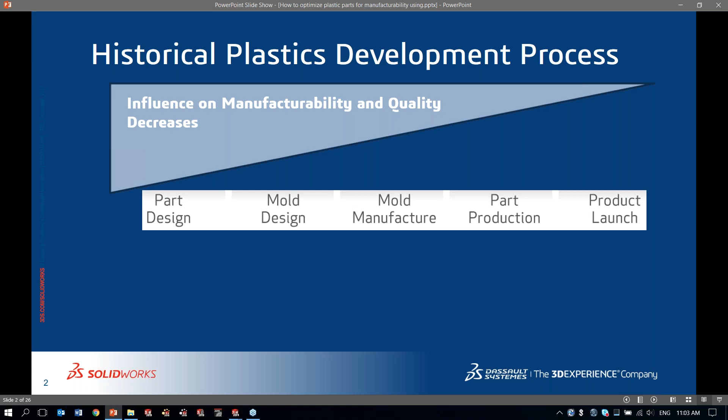So the beginning portion of this process influences immensely the manufacturability and the quality of our parts. So how the parts are designed and how the molds are designed both have an impact on these aspects of manufacturability and of quality. So if they're not verified, if they're just simply designed, then you have less manufacturability and less quality.

Then you move on to the next section of the process where you're making the molds, you're making the parts, then you increase the responsibility that you have as a manufacturer to meet your requirements that are expected either from the person you're supplying this to or the consumer that's going to be buying these parts. This is where your guarantees need to hold up, and we want to have your part have the best quality.

So let's take a look at some options of how this is typically done in the design of plastic parts. So the part is designed, the mold is designed, the mold is built, we go to production, and something is detected that the part has a defect at this point. Then what we do is we circle back. So they can go to in-depth simulation at this point, which may be one solution. It may be done in-house. It may be done by somebody else who has more expertise in the simulation.

Or simply the process can circle right back to part design, mold design, with iterations of trial and error, of let's see if we can try something else that will make it a little better. This is obviously very costly, very inefficient, and when all is said and done, hopefully the problems are fixed, but there are obviously better ways. So we're not quite there yet, though.

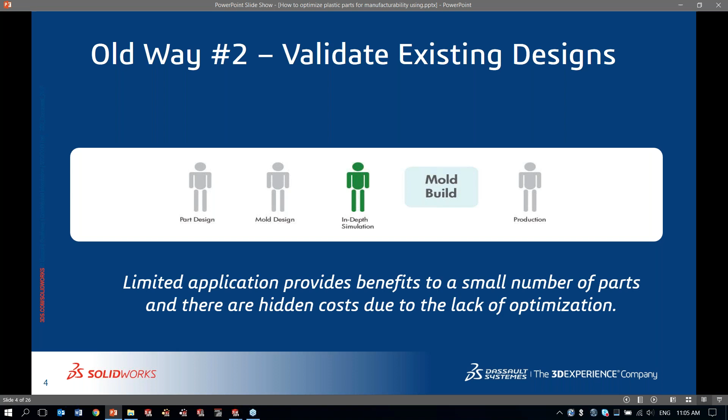As we're doing this, obviously people who are doing this are basing their designs off of a lot of experience. And there's great value in that experience. But sometimes, even as a designer, you're asked to do something that's new, that's different, that may be smaller, that may be just a little more challenging. And at this point, experience takes you to a certain degree, but it would be a whole lot better if you had the confidence of simulation behind it.

And the optimized way, or the preferred way, would be to be able to design your part, simulate the part so that the part itself is manufacturable, will give you the quality that you want, design your mold for it, and have that also simulated, whether you're doing it or another company is doing it, making sure that that section is simulated as well before you go to manufacturing anything at all, so that your end result is as optimal as possible.

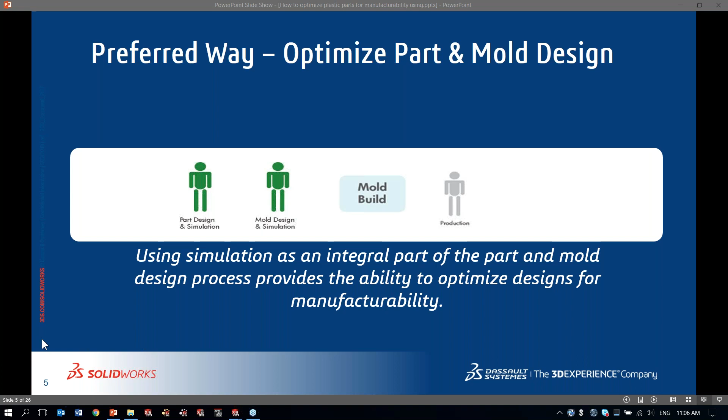has the best quality, and you're sure that it is manufacturable at that point and that you're not coming back to do it. Because as you're doing all of this, there's a cost to doing the work up front, which is the case here, versus doing it at the back end. And in our next slide, we illustrate how this cost is propagated.

So you're going to say, well, if I do all of this work at the beginning, I have to, one, invest into simulation tools, which is going to cost us some money. We're going to have to learn how to do this, and then we have to take the time to do the simulation. And the reality is, yes, you have to do all of that to be able to do the simulation at the beginning.

But the reality is also that this will cost you less, will have less impact on the overall cost versus having to take a design that's already been done, a mold that's already been manufactured, parts that have been manufactured, and come back and start back at the beginning. So this illustrates this a bit. Best to take the time up front and invest up front in doing this versus the cost at the back end.

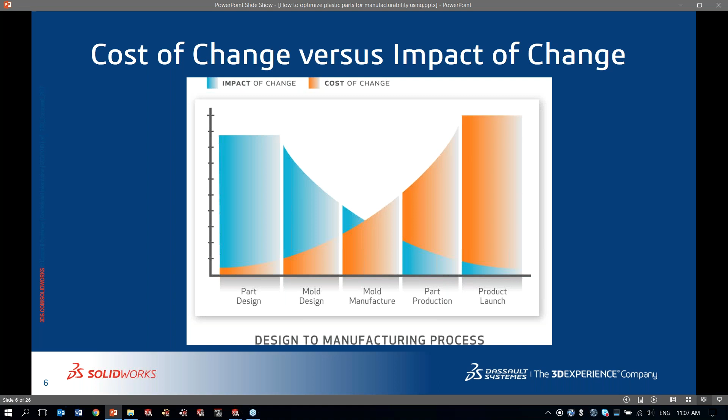So with this topic, we have information today on the first part of this, which affects your part design. So Michel is going to take you through some information on how to optimize plastic parts and how to get them right the first time so that iterations don't have to be done. And we have a session next week that's scheduled to go into the later part of the design, which is how to simulate your mold manufacturing, so that that portion also guarantees you the best success in your part production.

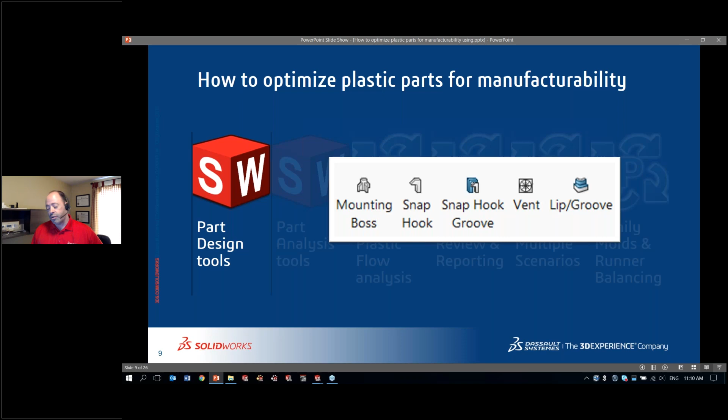Inside of SolidWorks, before we go to plastics, we're going to explore a few of the design tools. Those are really design tools geared for molded plastic parts, things we see quite often in a plastic part. If you have an old TV remote and you take it apart, you're going to see some of those features in there, that's for sure. So I'll cover some of those and see how we can use them inside of SolidWorks. So let's just jump in SolidWorks.

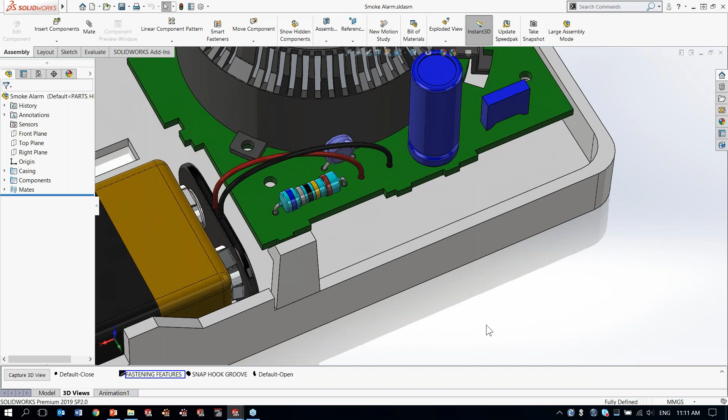So as I'm moving inside of SolidWorks, this is going to be the example I'm going to be running with today, a little smoke alarm. And if we isolate this area, we see a PCB board, and we need some mounting bosses to support that board. So I'm going to simply, in the assembly, edit this part.

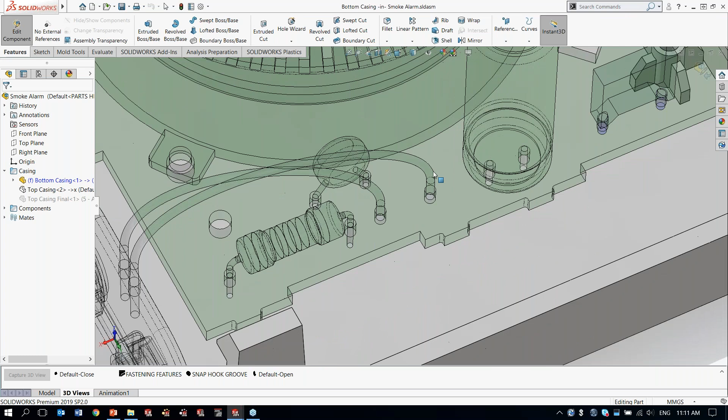And as I'm doing that, I want to just show transparency so we can see a little bit better through the PCB board. And as we can see over here, there's already a mounting boss set in there to support that PCB board. We want to create another one for this hole here. Now, how do we go about doing that inside of SolidWorks? As I said, very easily, I do have my features here, and one of them is a mounting boss.

The only thing I need to select here is a face where to set this boss. I already have a great preview. We have different options for bosses, so either a hardware boss with a head or with a thread type design, or it could be a pin with, again, a pin design or a hole design. So all the variations are there. It's really about you selecting which one works best.

And then when you do that with a great preview you get on the screen, you can go in and define all of the dimensional information for that feature. So you don't have to draw anything, you just have to select the right size that works for your design. Now, additionally, if you want to standardize, what I like to do quite often is actually create favorites. So this is my favorite hardware mounting boss dimension. I select it, everything is preset. The only thing I need to do at this point is to select where it's going to be located.

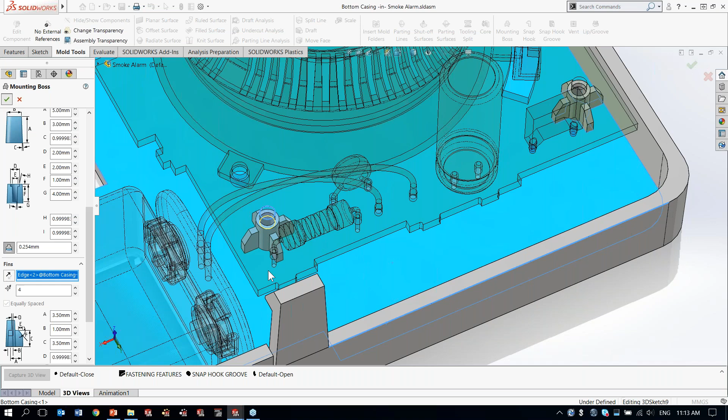So I'm going to pick the circle here of my PCB board hole. I select it. Last thing I want to do is orient the fins, and you can see the fins are not oriented the same way. So I'm going to pick an edge to help them orient the same way as the other one. And very quickly, I've got this done. That's how easy it is. I got the whole feature. I didn't even have to sketch anything. Everything is ready to go and ready to get to the next step.

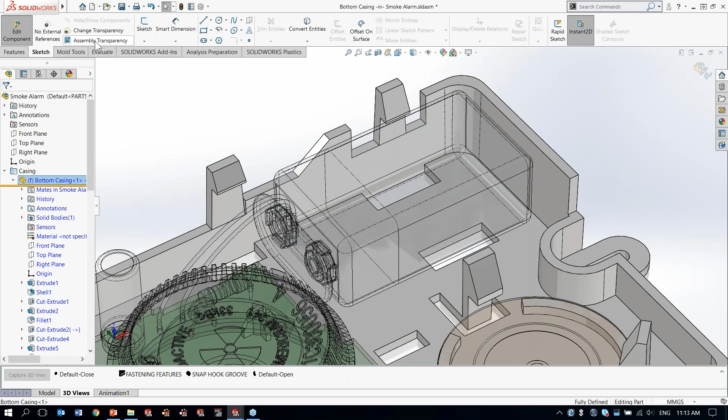And the next step, I'm actually going to show something different. Let me just rotate the model around and zoom into the battery area. So in that area, what I want to do is to design a hook that's going to snap the battery in place. We already see some hooks designed over here. That's for the core cavity, but I want to design and show you how we can create those very easily again inside of SOLIDWORKS. So again, one of the fastening tools I got is a snap hook. How does it work?

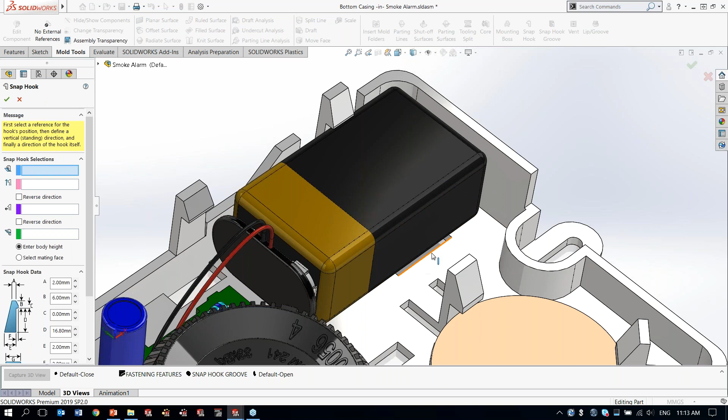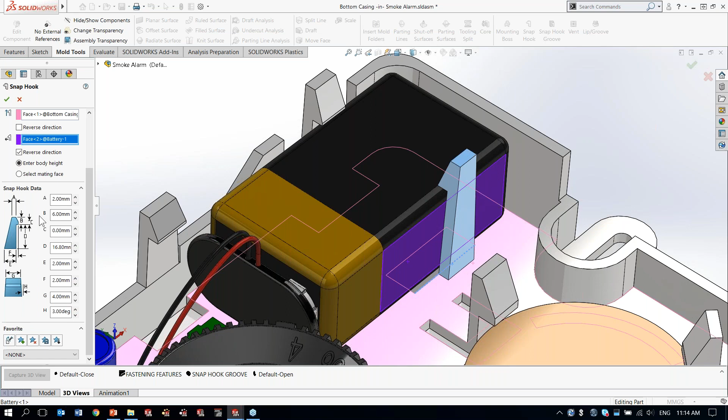Again, very easily. I select where I want it to be located, the direction, I use a face as a direction. I want it to be flush to the side face of the battery, so I'm going to select the face here and say reverse direction. As I did with the mounting boss before, I could come in and tweak all the dimensions or use a favorite. And as for the height, I want to again repurpose the actual part here and say it's going to be flush to the top face of the battery. And with a great preview, I know exactly what I'm going to get. I click OK, and I'm done. So again, the snap hook feature is really useful when you want to create those designs really, really quickly.

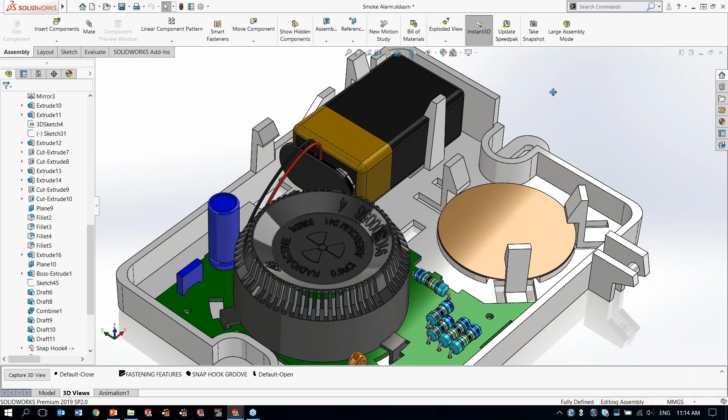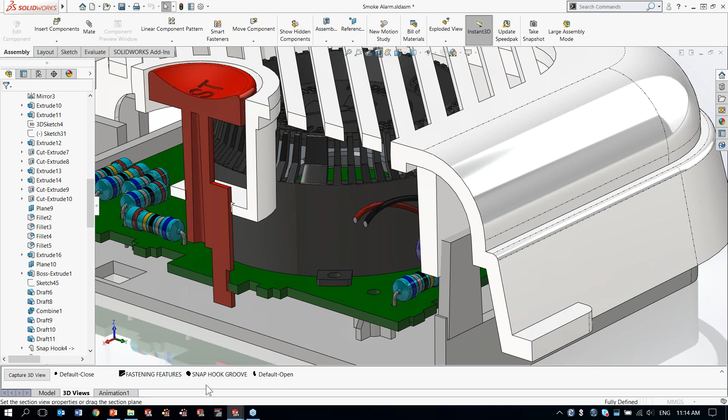Now, the other thing I want to do here is let's go over here to my orientation, and I'm going to get into that section view. And if we zoom in, let me just go and modify the section view and push it in a little bit further. And as you'll see quite quickly, over here I've got my snap hook design, but in the other part next to it, I need to have that groove that's going to accommodate the hook, right? So let's go ahead and see how we would do that.

Again, in the context of the assembly, I'm going to edit the top part. And I got the feature snap hook groove designed specifically for that. The only thing I need to define is what is my hook. That's my snap hook. In which part do I want to design the groove, so it's going to be into this one here. I select it. And then I just have to specify the dimensions of the groove, click OK. And again, SOLIDWORKS goes ahead and creates that for me without having to sketch anything, design anything. Everything's done, everything's easy.

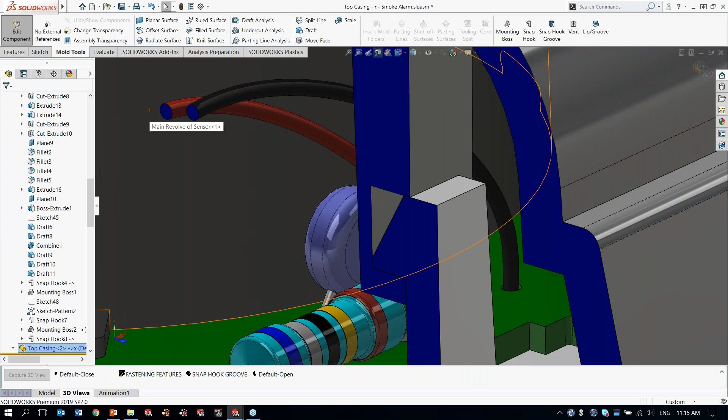There we go. So as you can see, there's quite some nice design tools inside of SOLIDWORKS just to save you a lot of time just on the design side of things. Next, I want to talk about, again, inside of SOLIDWORKS, some of the analysis tools we can use inside of core SOLIDWORKS to help with plastic part design: draft analysis, undercut analysis, and things as such.

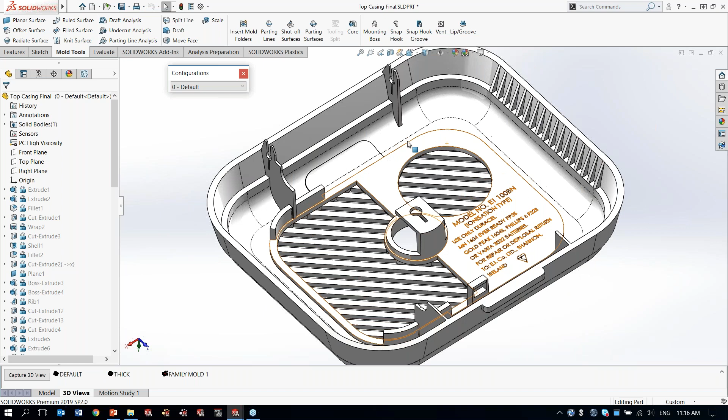So again, let's switch back to SOLIDWORKS. And in this case, I'm going to go to this part. This is my cover for the smoke alarm. And inside of SolidWorks, inside of my mold tools, let's explore the first one that probably everyone uses in a very common way, the draft analysis. One of the key things when you have a molded part is to make sure that you have a good draft analysis on those faces.

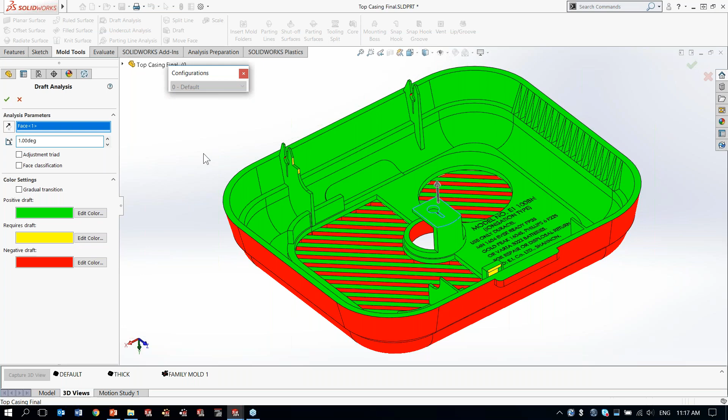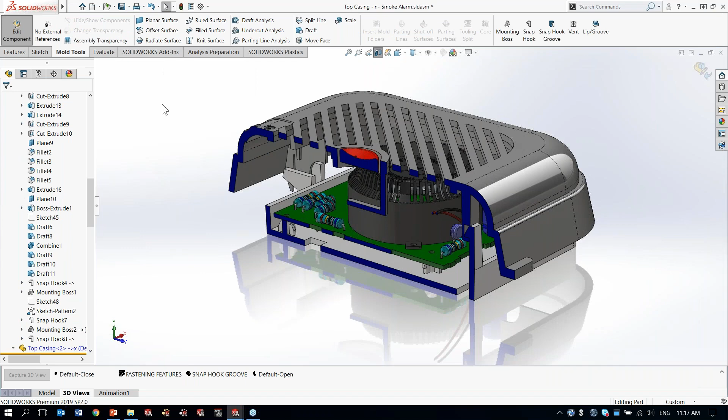So I'm going to set my draft analysis to 1 degree, and now we have a nice color code all the way around this part that shows us the draft and the properties of those drafts. So if there's any faces that need draft, we could fix them quite quickly. Actually, I wanted to show you this part. So let's switch components and instead go over here and open this part. So I actually wanted to show you one of the designs that had a draft problem, so we can show you how we can fix it quick.

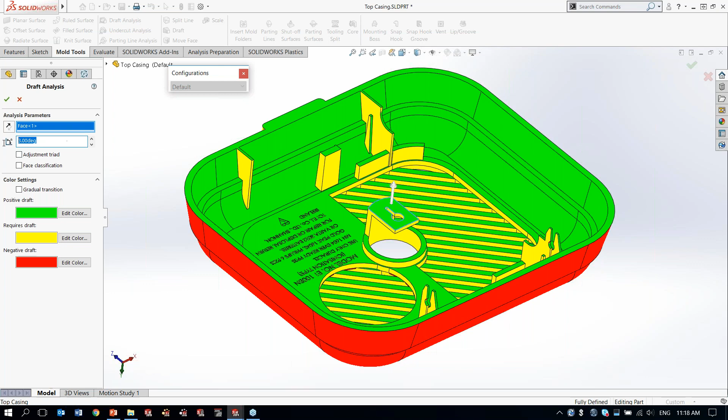So over here, again, let's launch the draft analysis. Very easily select a face for the pull direction, select an angle. There we go. So this is actually what I was looking for. I was looking for an issue so we can fix it together. And we see here that we have positive draft in green, negative draft in red. That's all good. But in yellow, those are the issue areas. So there's no draft here in yellow.

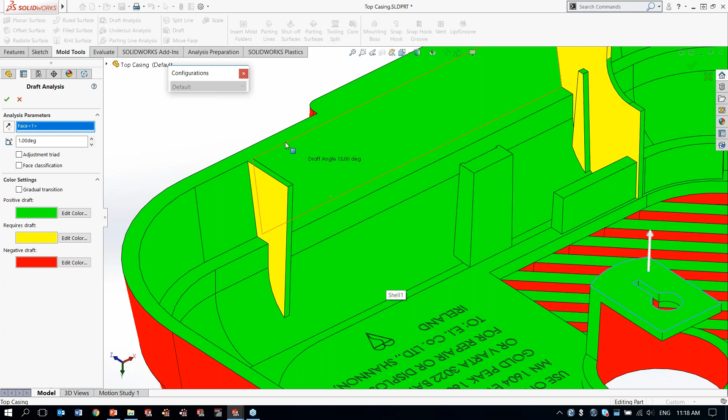One of the nice things I like about SolidWorks as well, when I do the draft analysis, as I move my cursor on those faces, I have a real-time readout of the actual draft angle on that face. So as I move around, I can tell exactly what's the draft angle at that particular location. When I click OK, you're going to notice that the draft analysis actually stays active. And it does that so it helps me figure out, when I add a draft to those yellow faces, if I'm doing things correctly.

So I selected a face for my draft angle. I'm selecting the faces to add draft to. And after I do that, you'll see that the model simply updates and becomes all green, meaning that all my draft issues have gone away. So I got a good draft analysis. I got good drafts on all of the faces.

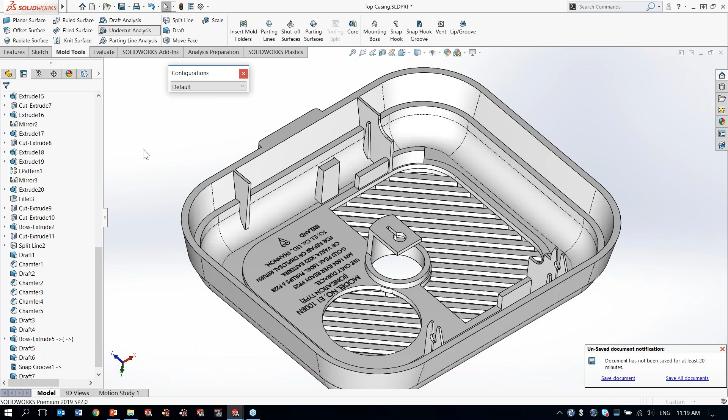One of the other tools I like with SolidWorks is the undercut analysis. Similar to the draft analysis, the undercut analysis is going to show you faces where there's an undercut, which in the mold world would mean that you probably would have to have some side actions in your mold. So that's a really quick way to understand if the cost of the mold is going to go up because there's more complexity in your mold.

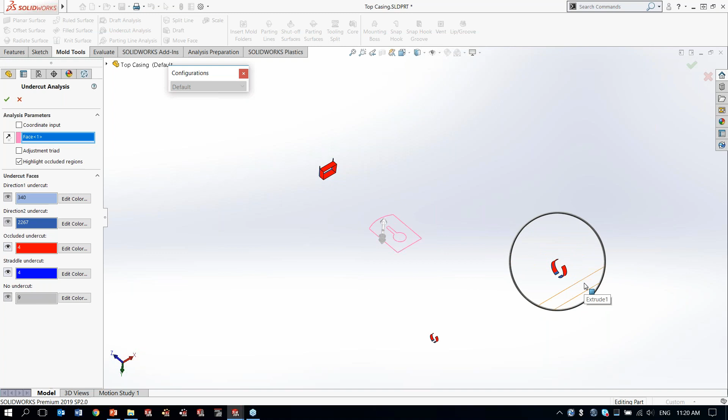So very quickly, I'm able to figure out these areas here you see in red. So for that, I'm going to have some special operations in my mold to figure out how to pull this or open the mold, some side cores and things like that. So with some of those tools, you can also eliminate some design flaws that could creep up into your mold design or part design very quickly, to eliminate some of the errors downstream.

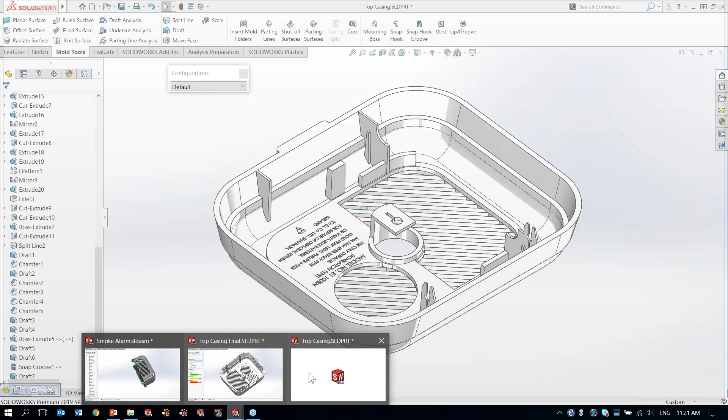Now, next thing is that we actually want to start doing a plastic simulation. So here I'm going to show you how to create from scratch in a part that plastic injection simulation by selecting the material, running the analysis, and later on, we're going to look at some of the output results. And I'm going to do that live, mind you. So everything here is going to be done live. So let's go to our part. And I'm going to leverage quite a bit the configurations inside of SolidWorks to do that. So let's quickly reorient it.

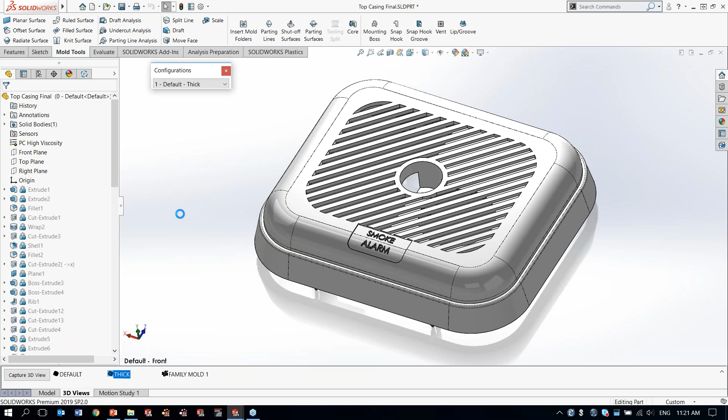And actually over here, that's the orientation I'm looking for. SolidWorks Plastics is an add-in to SolidWorks, though in the add-ins you see it's already turned on. So I'm gonna create a new plastic simulation.

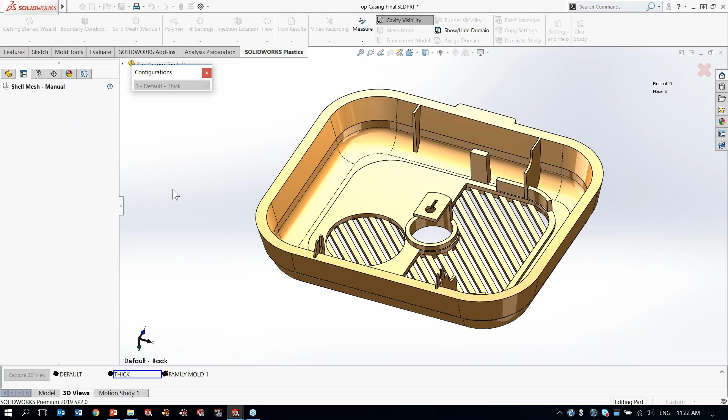So the first step is going to be to create a mesh, which is familiar. If you've done FEA before, it's very familiar. If you're not, it's still very easy. We could do it automatically without much input. I'm actually going to create this one manually because I'm going to be running this live. I'm going to start with a fairly coarse mesh size so it runs well and we don't wait too long for results to come back.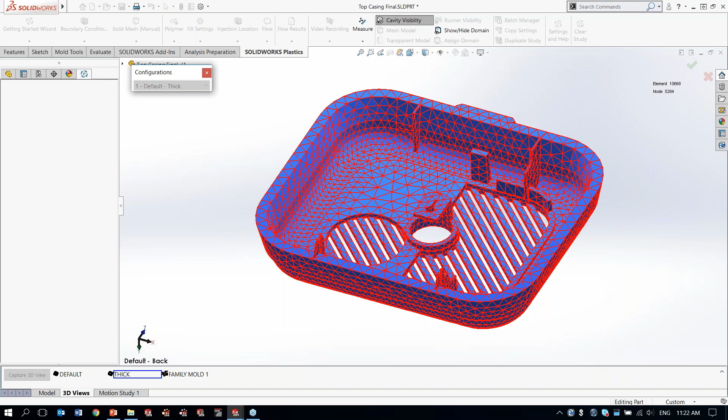But very quickly, I'm able to take this model, create a mesh, and once my mesh is created, I click OK, and I'm basically ready to go to the next step. I need to define two more things before we actually run the simulation. First thing is the material. So I can go over here in my materials, open up the database.

Now this database has hundreds, if not thousands, of materials already set in. Based on the plastic type, I'm going to actually use a PC material. Based on manufacturers, there's quite a bit in there that's just PC, so a few hundred. So there's like thousands of materials in here. For now, we're going to use a generic PC type material, and we can see the viscosity and all of that information about that material. And you can also create your own user materials as well. I'm going to use the one in the library, which is a fairly generic one.

I've set the material. The last thing I need to do before I run the simulation is to set where my gate is. Now I think that a gate location somewhere over here might be a good area. So I'm going to select it on the screen on my model. It's going to be a 3mm gate size. I say I want to add location. Click OK. So very visually, I know exactly where that gate is. And at this stage, I just need to run the simulation.

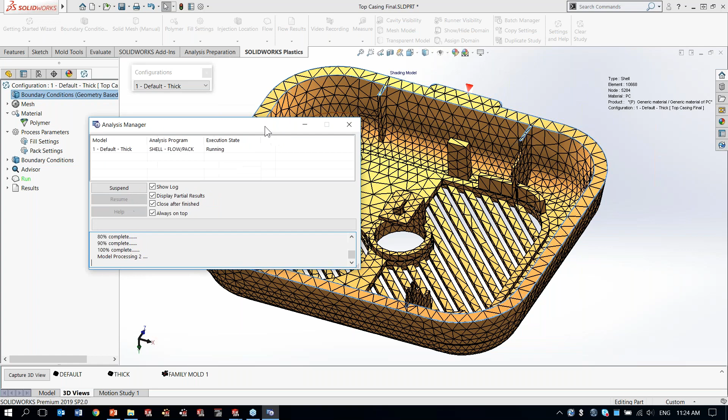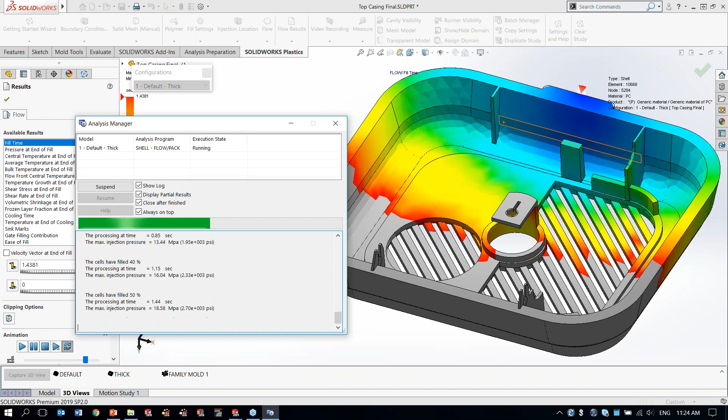Now I'm actually, again, running this live with you guys. And as it's running, we can see some results in the window here. We can actually see the pressure at that percentage of filling, and we can see the mold starting to fill on the screen. So as it's doing its calculation, it's also starting to show me some preliminary outputs and results. So if I see something totally off, I could actually just kill it and maybe decide on a different injection or gate location. But very quickly, I'm able to get some outputs.

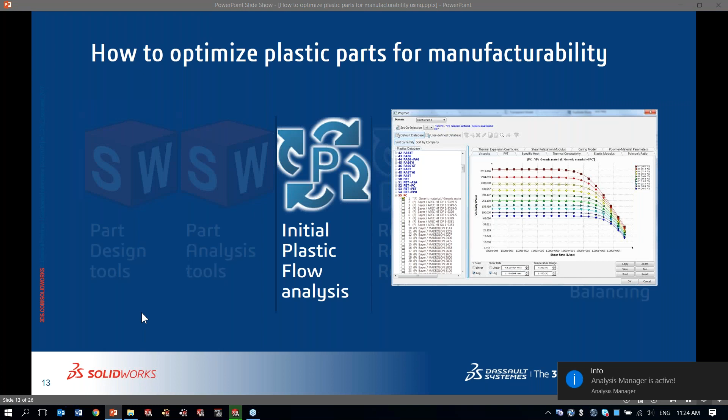So as this is running, I'm going to minimize this and go back over here. We'll look at the results right after that. But I hope you can see how quick and easy it is to set up a plastic simulation. Very quickly, I've created three things, really: the mesh, defined the material, and once the material is defined, you just need a gate location. And for something as simple as this, that's pretty much all you need for it to run.

Now, as the simulation is finishing up, we're going to look at the results and see how we can understand those results to figure out if this is a good part or not. And then we're going to do some reporting to share those results with other team members, for example, to see if our part can be molded correctly and is a good part.

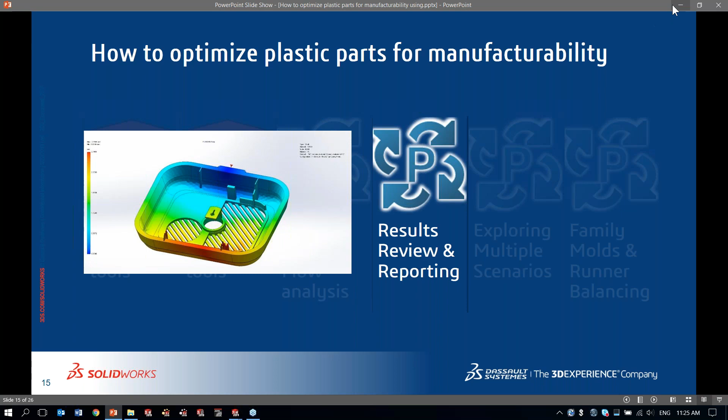So when your simulation completes inside of SolidWorks Plastics, we get this output, which is the fill time. The first thing I like to draw attention to is the result advisor, which gives you kind of a green, yellow, red light system telling you if it's easy or not to fill this part. It's telling me that the maximum injection pressure is 33 megapascals.

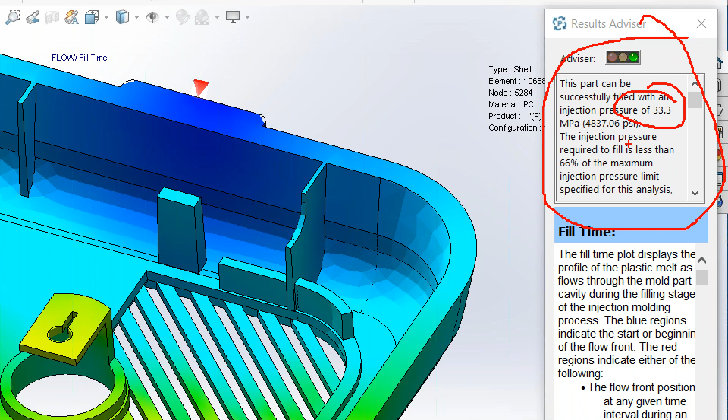Most injection press machines will probably run around 100 megapascal, so I'm actually not quite using the full capacity of my machine. It could actually take a lot more. That's basically what it means.

There's that effect we call race tracking, where the flow front on the wall is actually coming faster around the part than it's filling uniformly. So that's a phenomenon called race tracking. Usually that means that my wall thickness is too thick, so we want to eliminate that.

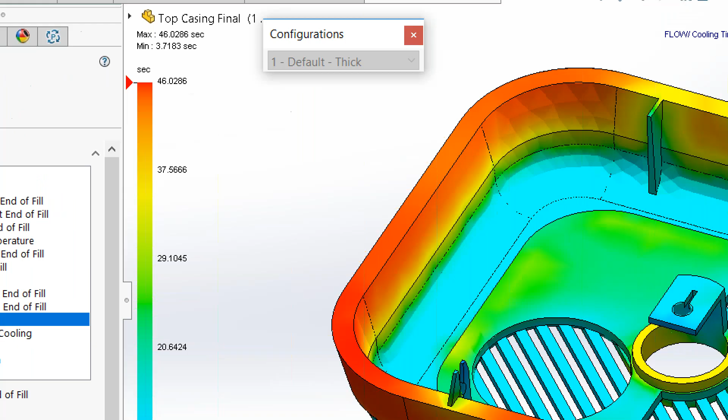But we can also look at other types of outputs. One of them is going to be the cooling time, and we see that the cooling time is actually quite high, 46 seconds. That means this part has a long manufacturing cycle. If we want to get the cooling time lower to be able to produce more parts in the same amount of time, one of the solutions is going to be to get the wall thickness down.

So very quickly, we're able to see in this part that the wall thickness is too thick. We kind of deducted that because of the race tracking effect, and the cooling time is quite high.

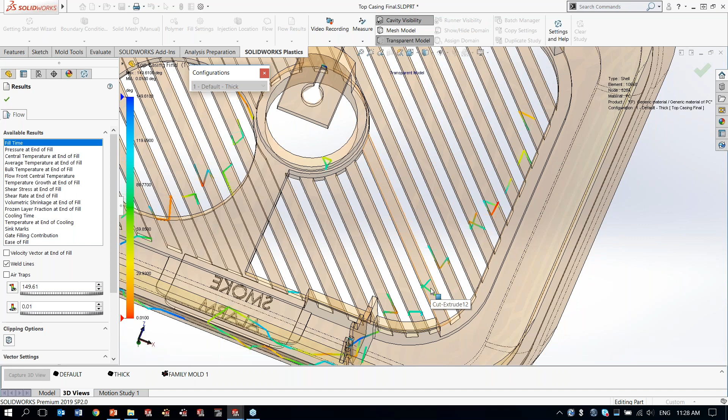If we look at some of the other outputs, we can look at the weld lines. Looking at the weld lines, we see that there's actually a lot of weld lines located in the grill area or the opened out areas. Now we want to avoid weld lines as much as possible, although we can't. In a part like this that has internal openings, there are going to be weld lines, but we can strategically decide, depending on the gate location, where those weld lines would be.

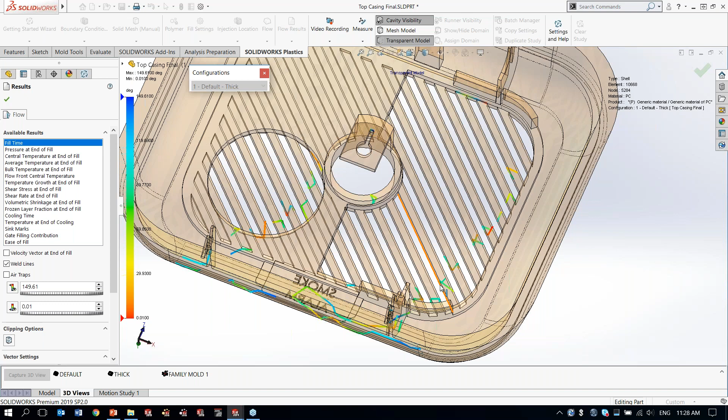This is going to have a negative effect on the structure of the part - it's going to be weaker at the weld line. So we want to avoid having weld lines in an area of the part that's already weak, like those openings. That's something to keep in mind a little later on - we're going to see how we can fix that.

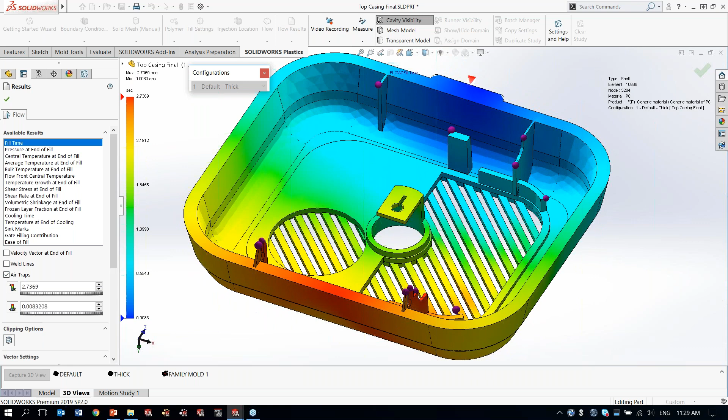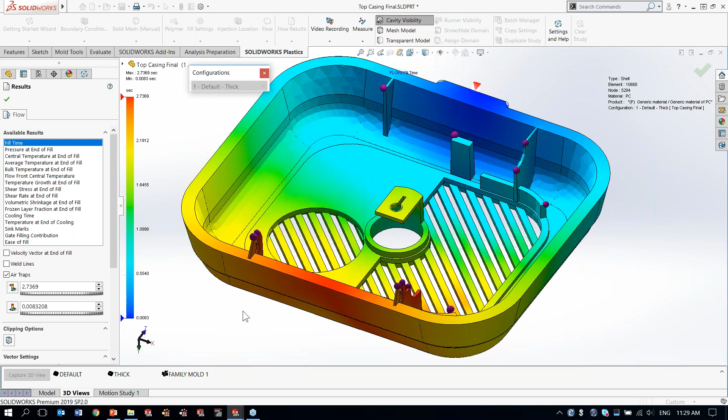But we can also look at air traps. Again, another common problem in mold making is getting rid of the air inside the mold so it doesn't burn the part. Now we can quickly see where the air traps are located. If they're on the split line, usually that's good because the air can vent through that split line, but it can also be a really good indicator of where to position ejector pins, again as a method of venting the part.

There are so many other outputs, I won't go through all of them, but what's kind of neat is we can also create a summary and report quite automatically from this. I already created the report yesterday, and I'm going to show you the output. It actually creates three types of reports - the first one is a Microsoft Word report.

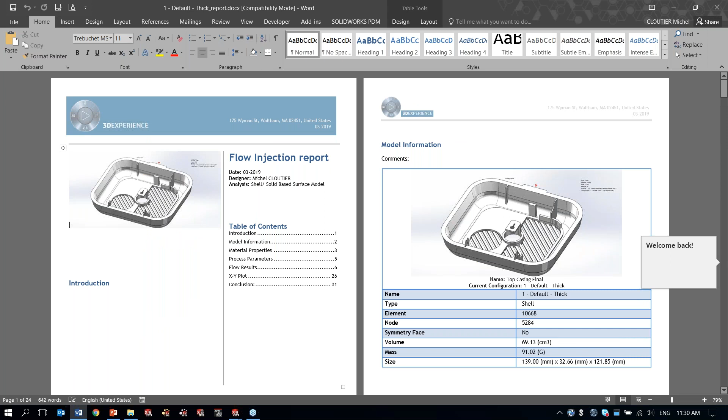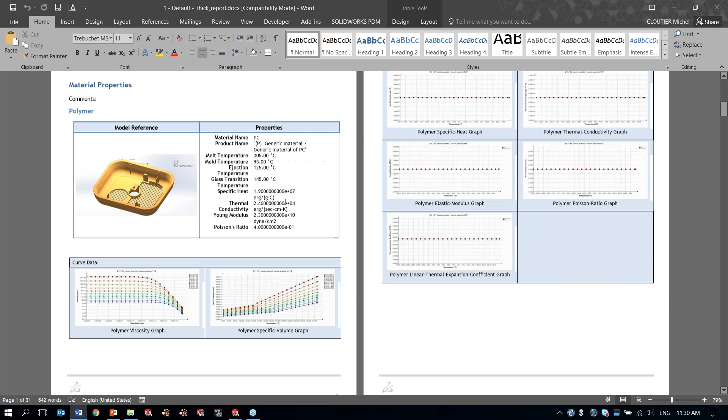Again, this was done automatically, I didn't edit any of this. It was just a simple output with all the information about my part, the material I'm using, with a graph for the viscosity, all that information. Again, my fill settings, my flow summary, and then down here, all the outputs selected for my report - fill time, pressure at end of fill, temperatures. So all of those reports or outputs can be captured in a Word document.

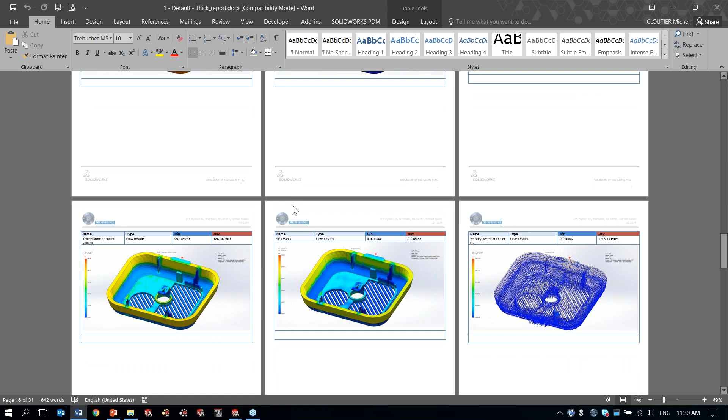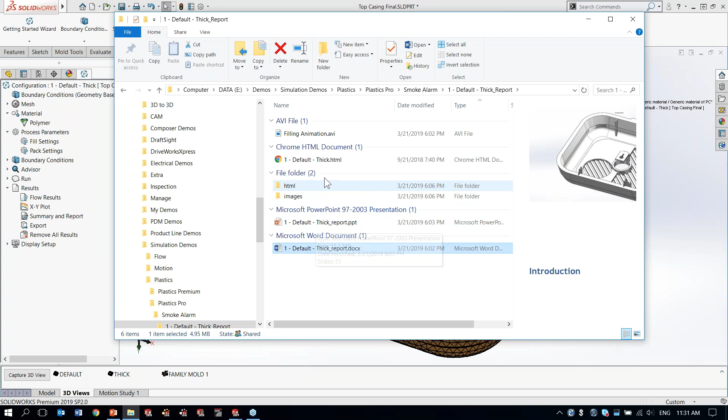We could also output a PowerPoint or even an HTML output. Now the nice thing about the HTML, you'll find pretty much the same information, but in the HTML you can even have animated images that show all of those simulations, those outputs.

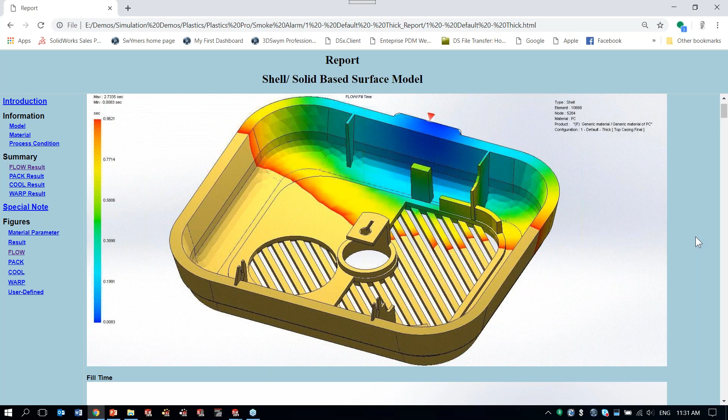It's a great way to share and create that information, but really it's to understand what's going on. So quickly, when we look at the outputs, we understand if there's any issues with the design of this part, and we can start making assumptions as to how to fix them. And that's exactly what we're going to do next.

We're going to go ahead and explore multiple scenarios. Now, what could those scenarios be? It could be scenarios about a model change to design a better part, maybe change the gate location, maybe change the materials. I'm going to be doing a mix of all of those.

So the first issue we saw on this part was that the wall thicknesses were too thick. That gets the cooling time way up, too much time to cool down, which can introduce other errors like sink marks, which we could show on a graph. I didn't show that output, but that's one of them. So let's start by doing a model change and see if we can make the part thinner to reduce cooling time, have a better injection profile, and things like that.

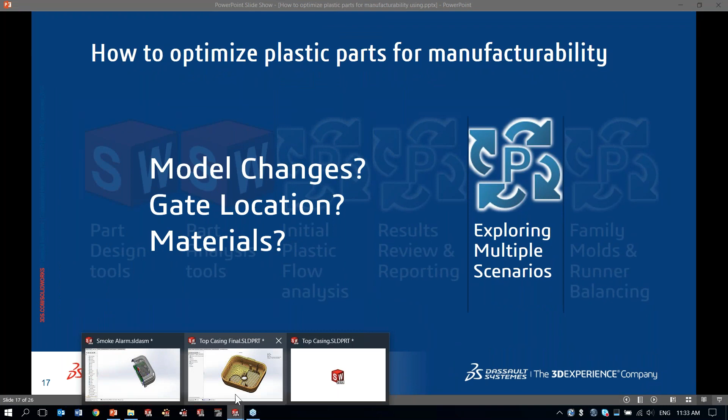So let's get back into SOLIDWORKS. For the other outputs, I already ran the simulation to save some time, but like I said earlier, I'm going to leverage configurations. I've got a configuration here that's thinner, so I'm going to jump to the thin configuration. You see the sidewalls are fairly thinner compared to the other one. And that's going to actually highlight another issue that we see quite a bit inside of injection molding.

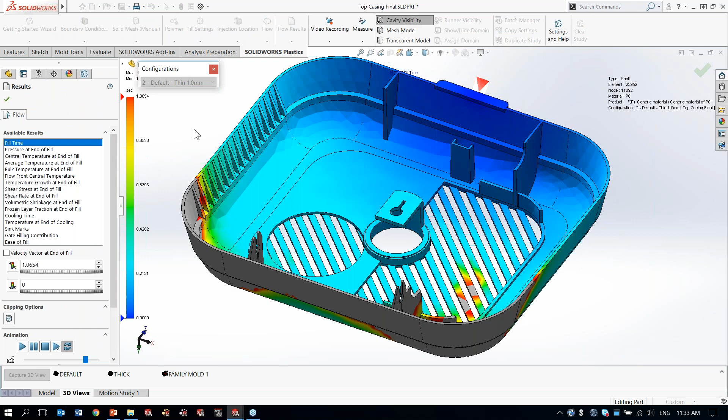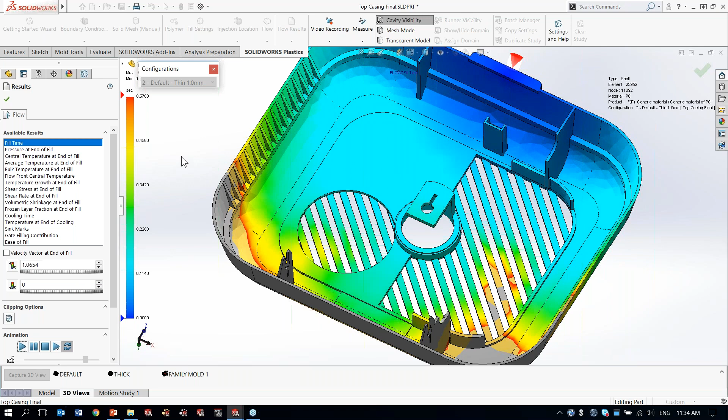If I show the results, you'll notice something: some of that part is actually grayed out. That means this part is not even filling completely. In the lingo, it's called a short shot. So even though the first part would have worked, it was not ideal - it was too much plastic, took too long to fill, etc. This one is actually a defect. It doesn't even fill completely. This would get out of the mold and you would throw it away. That's a really bad thing in mold making. You don't want to get a short shot.

So you can actually understand those short shots and see if they're going to happen. I'm going to change to another model where the thickness is in between the first and second, and see if that works well in my design. So that's my configuration here. Let's read the results. So now we're showing the results - we're showing that it's actually filling completely. So that's a good thing, right? The fill time is going fully.

Now, another issue we illustrated earlier was the weld lines. It's still filling - it's a good happy medium for thickness, but I still have a lot of weld lines. As I said earlier, you can't completely remove weld lines, but you're going to try to avoid them as much as possible, or strategically locate them where they don't affect the structural integrity of the part, because a weld line is a weak point in the part. We see that we have a lot of weld lines already in a weak area of my part, which is those openings.

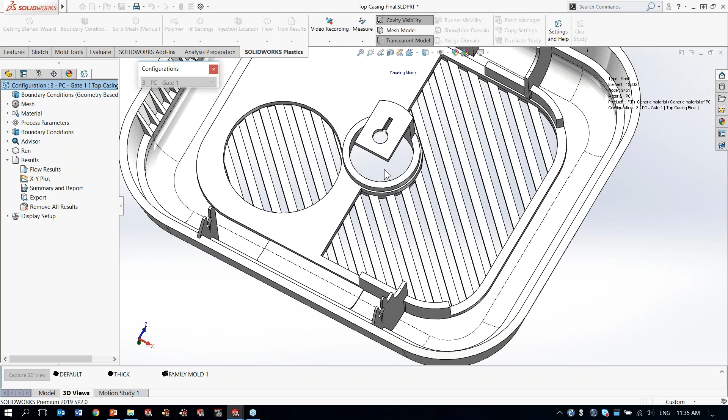So how do we fix that? Well, one method we could use and see how it affects the weld line is to change the gate location. So I've got a configuration here where I've moved the gate location that was originally on the top, and moved it to be on the side, in an effort to hopefully get rid of as much weld lines as possible. So you see now my new gate location is right over here - prior, it used to be here. I'm hoping that by doing that, it's going to change where the weld lines will be.

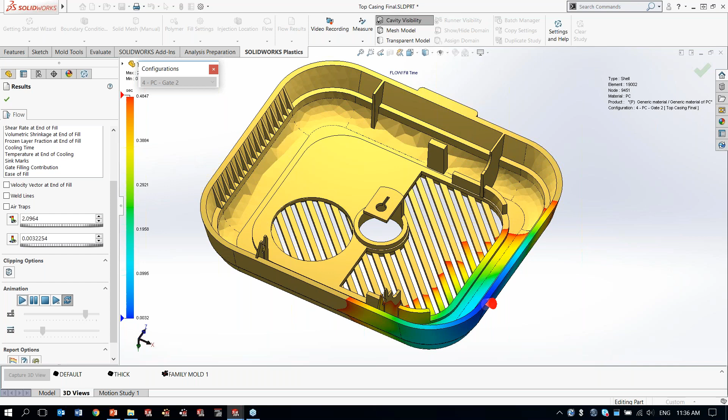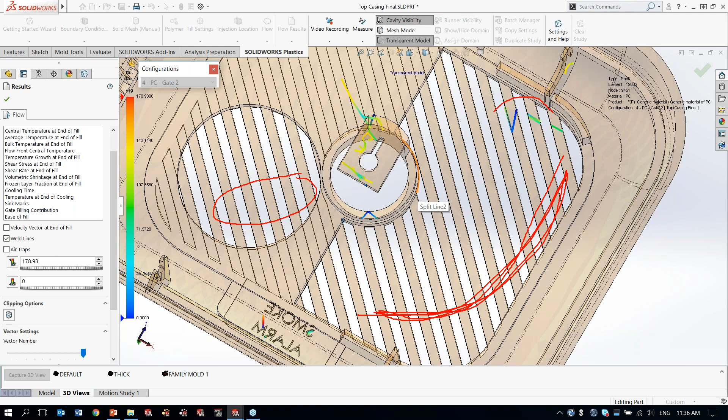What's the output? Again, let's read the flow result. Obviously it's going to fill in a different direction, right, because the gate location is set differently. So now we see that it's filling from right to left. And when we look at the weld lines, we realize this is actually a lot better than what it used to be. In my previous design, if you remember, we had a lot of weld lines in this area - many weld lines located over here. Now we only have a few over here, so you could say those are negligible.

It's not going to have much effect, but it's still much better than my previous design. So this is great. Let's talk about how we can still optimize further this design.

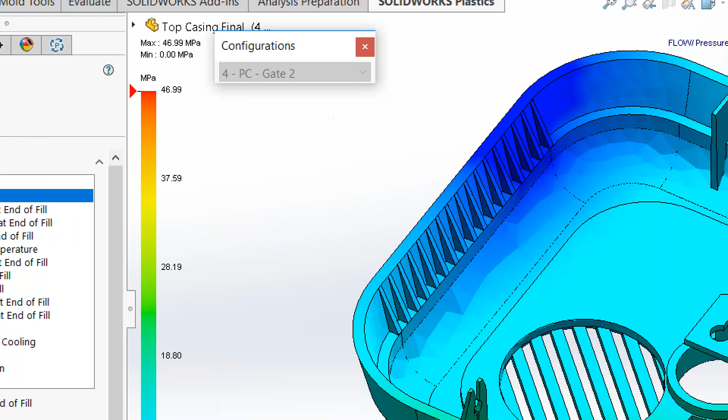One of the things I want to look at now is the pressure at the end of fill. We see that pressure listed here, which is about 47 megapascal. A typical injection machine is going to push about 100 megapascal, so you could say I'm still well within the limits of my machine, but I'm preparing myself to do a family mold, so I don't want to have a mold with one cavity. You have multiple cavities, and I know that by doing that, it's going to increase the pressure required to do the injection.

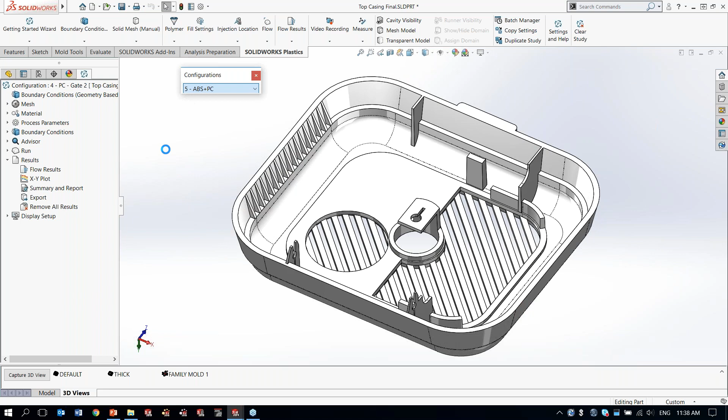So at this stage, I want to see how I could actually reduce the pressure at the end of fill, and we're going to do that by trying different material. I like the gate location, I like the model, so now let's try a mix of ABS and polycarbonate copolymer as my material rather than just PC. We know that ABS PC by experience flows easier, doesn't need as much pressure to fill a mold. So let's see how that stacks up using the same gate, same design.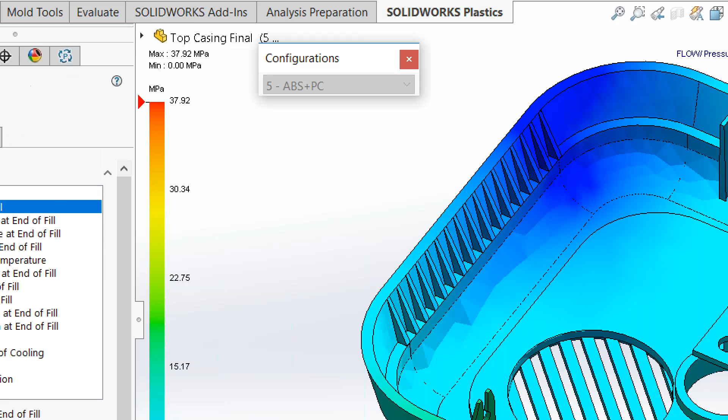Now using this material, we see that we reduce the injection pressure to 38 or something, where it used to be close to 50. So this is a good design, a good choice to go on and continue our design, or at least figure out which best scenario works in our model.

So if we review a little bit the scenario, we went through a number of scenarios quite quickly. In the first scenario, we saw that the part was just too thick. There was some race tracking around the part, a lot of weld lines, cooling time was too high, not a good design. Second one, we got a short shot, obviously off the gate, short shot, no good.

Then we redesigned. We found the happy medium as far as thickness goes, but we had a lot of weld lines. That was an issue. Although we reduced the cooling time, the weld lines were still an issue. We moved the gate location and got rid of the weld line problem we had earlier.

But again, thinking forward that this is going to be into a multi-cavity mold, I wanted to reduce the injection pressure so I could actually use that into a multi-cavity mold, knowing that having multiple cavities in a mold will increase the pressure. We wanted to do that. So the happy ending was the mix of ABS and PC material with the second gate location, with the optimized model thickness. That's my ideal design.

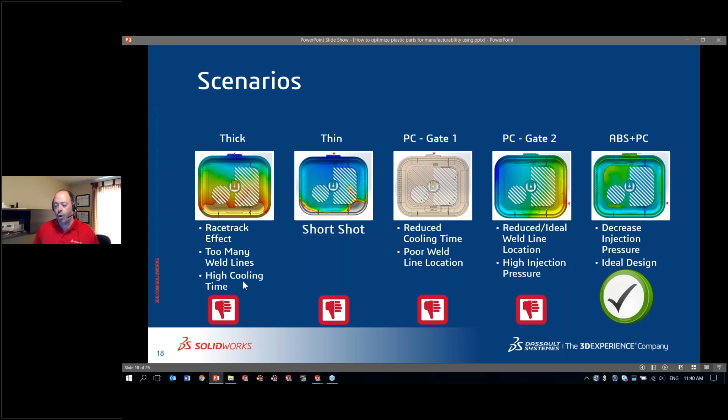So very quickly, I ran through 5 scenarios, and I did that within maybe 5-10 minutes. That's the power of what SolidWorks Plastics can do for you. You can actually do those scenarios before you start doing anything else and manufacturing the mold, which can be quite expensive.

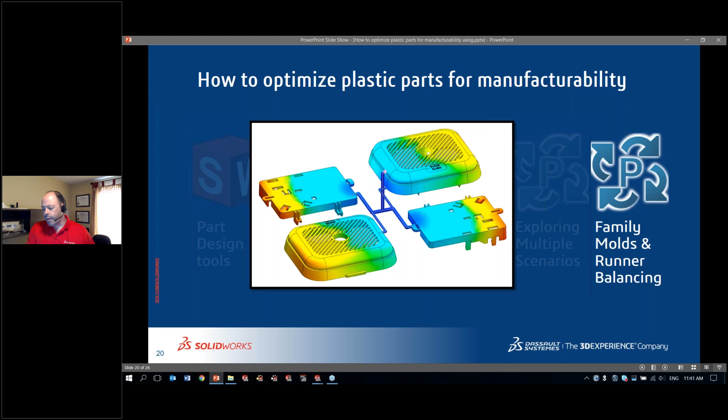So we explored the best option, and now we're actually going to dip a little bit into mold making itself, where we want to do a family mold and we want to do runner balancing. If you're not familiar with runner balancing, I'm going to illustrate what runner balancing is and why it's important in mold design. Before we do that, let's jump and look at our family mold layout.

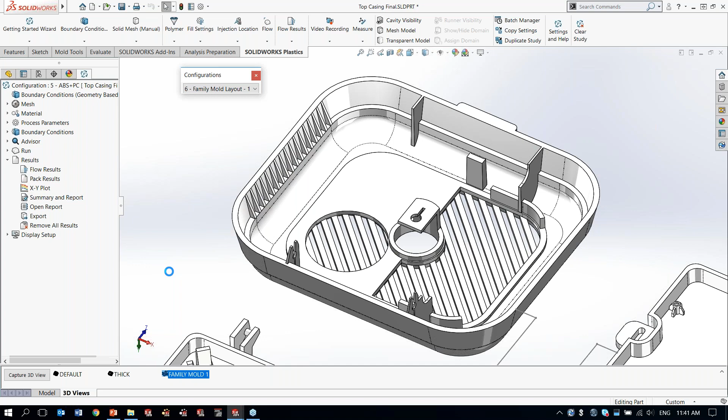So over here, I'm going to go to my family mold. As you can see, as it's loading all my plastics results and updating my part here, you'll see that I have a 4-cavity mold, and I'm basically manufacturing 2 smoke alarms at the same time, top and bottom of each of the parts. So we see the top, the bottom, top and bottom there, and now we can run the flow analysis and look at the results.

One thing that is key when we do a family mold like this is to have the fill time be equal in all the components, and that's not easy. The reason why we want the fill time to be equal, or we want all the parts to fill at the same time, is to make sure that the material is equal in every sense. The finish is equal, even the physical properties are the same.

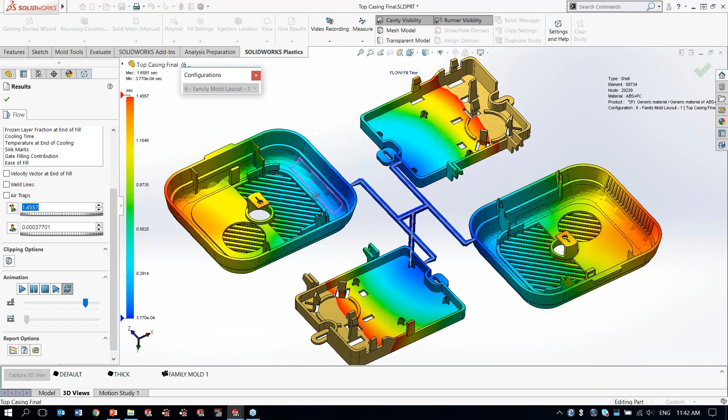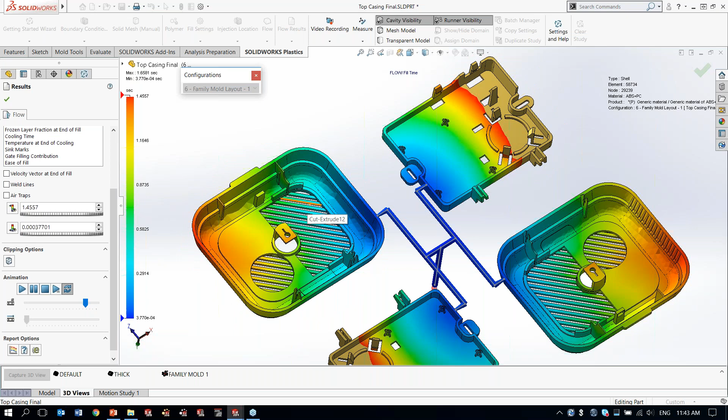So now, if I roll back the timeline here, you can see that the outside covers with the grills over here are already filled up completely, while these here are partially filled up. Now, again, the reason why we want to have the fill equal in all the components is so the parts are done at the same time. So time-wise it's good, but also to have the same finish, the same physical properties of each of the components.

And the way we do that is to do a runner balancing. My runners, which feed the molten plastic to the part, we can size them differently so that it controls the flow. So if I switch to my layout where I've actually done my runner balancing using SolidWorks Plastics, you'll notice that SolidWorks Plastics doing a runner balancing analysis will actually go in and size the runners so that the parts fill in exactly at the same time, and they fill in equally.

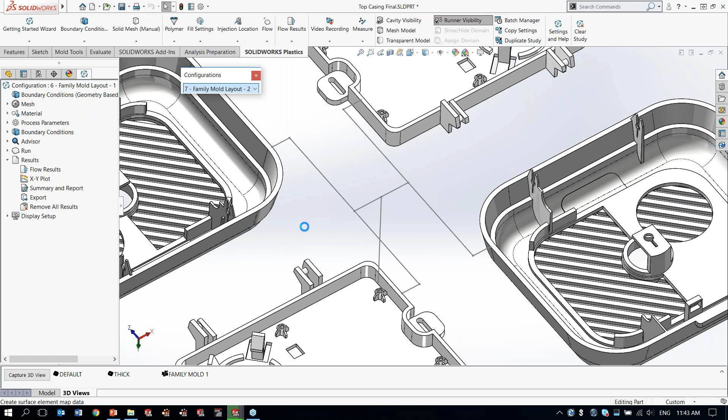So again, as it's loading my results, you see that some of the runners are actually smaller than the others. That's to control the flow inside of my cavities. And when I run my simulation, you'll notice as it's filling that now all the cavities are filling at exactly the same rate. So when the mold is completely filled, it's completely filled for all the parts at the same time.

So the idea again with runner balancing is to ensure uniform product. If some of the parts fill in before the others, the part might actually look different, feel different, even some physical properties might be different as well.

So what we talked about today. We covered how just using SolidWorks, some of the design tools inside of SolidWorks can save some time in the design stage, even eliminate some flaws using tools like draft analysis and undercut analysis. And then when we moved to Plastics, we saw how it was quick and easy to set up a simulation, just a few steps. Then we quickly understood the challenges that were in my current design,

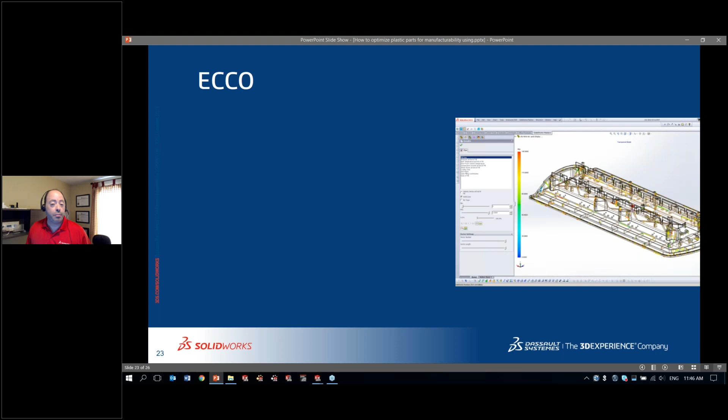So if we wrap up using a customer, ECCO, they do a lot of plastic part design and simulation. This is what they told us: If we didn't have SolidWorks Plastics, we wouldn't have as much confidence in the manufacturability of a design. It helps us avoid going back and forth with the mold maker after the fact, which saves time and reduces costs. And that's really the idea with SolidWorks Plastics.